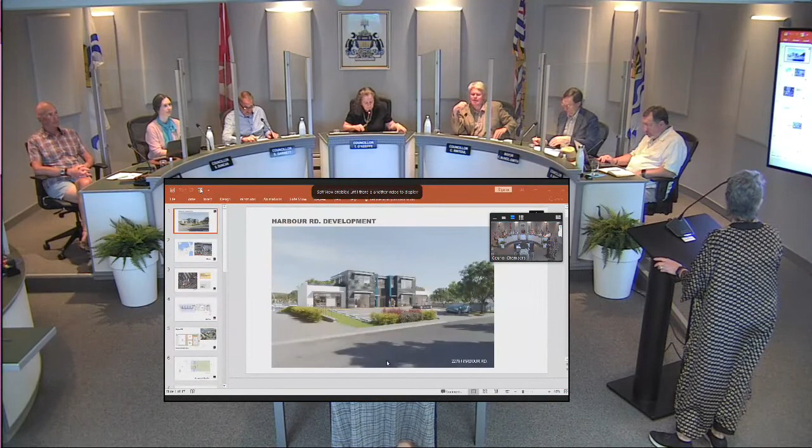Thank you. Good evening. Mayor and Council, we have the pleasure to introduce this project that you have seen before, like a year ago, with a different sort of proposal. That was a subdivision for residential units and commercial space. I didn't work on that project, so I'm not going to talk about it.

So the one that we're doing now, it's a combination of warehouse, 3 different uses, residential and commercial. So this is the front of the building, and I always have problems with this thing, so...

Okay, so the location of the site, as you're well aware, on Harbour Road, there's a marine industrial, light industrial area in Sidney, surrounded by some residential further away, but most of this area is the light marine industrial.

So the site is located here on Harbour Road, where the old Blue Peter was located, is now where the proposal is going to take place. So it's a small marina, and that wooden deck that is existing there will remain as such, and the whole development is going to take place where the parking lot is now.

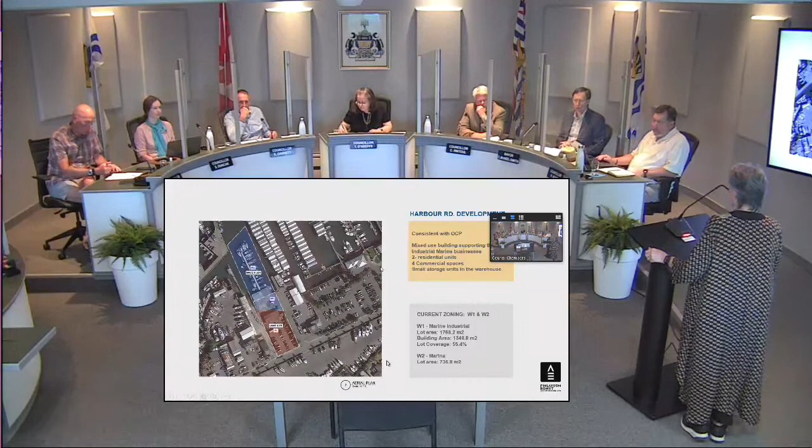So everything that's happening on W2 is the parking and services like an electrical room, mechanical room, and things to service the marina itself. So the project is consistent with the OCP, and is a mixed-use building supporting what is happening in the area. The 2 residential units add an interesting component to the area, and the 4 commercial spaces are going to be used again as potentially support for the area.

So the project itself, when we go to the site plan, we have a main access coming from Harbour Road that feeds the commercial units located facing Harbour Road. There is a pedestrian access coming right in the center, and the reason for that is, with that in mind, we were able to pull the buildings away from the road and not have to have an access point from Griffith Road, where the change of elevation is quite significant. So doing this allowed us to have one central access, not interfere with Griffith, and have a better resolution in terms of design and use.

So the 4 commercial spaces, again, are facing Harbour Road. This parking area is feeding specifically the commercial. So we have, in overall, in the whole building, the whole project, enough parking stalls to support each one of the uses.

Having the larger part of the parking in the marina ground is where most of the activity will be happening, so the residential units have their own garages. This entry allows us to get into the commercial, and also into this courtyard that feeds the residential units. We have 2 access points, entry and exit, for the parking on the lower ground, plus a garbage area and electrical at the bottom, and a loading dock to support the marina and commercial activities.

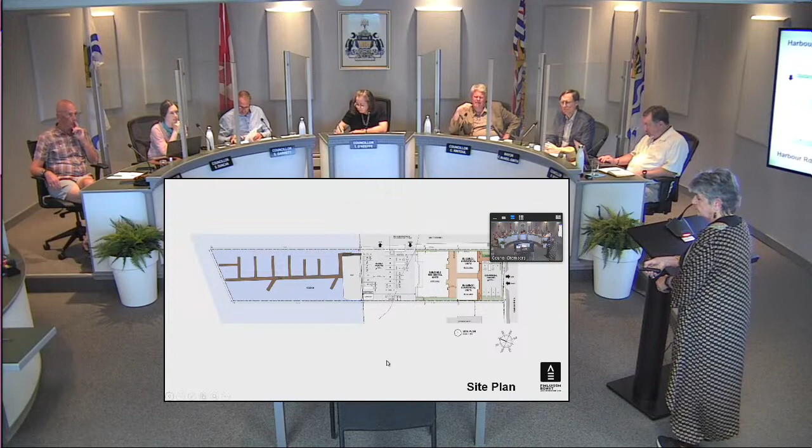All the buildings, both commercial and residential, have rooftop access with some garden areas and planters, to provide some interest and additional planting.

The ground floor looks after the warehouse. The blue indicates the access to the residential units above, which has 2 private parking stalls with their own access, a small residential-type elevator, stairs, and a storage area. Both sides are kind of mimicking each other, very similar. The entrance to the warehouse is in the center of this building, where we have vehicle entrance and pedestrian access, offices, electrical room, and all services, self-contained in this area.

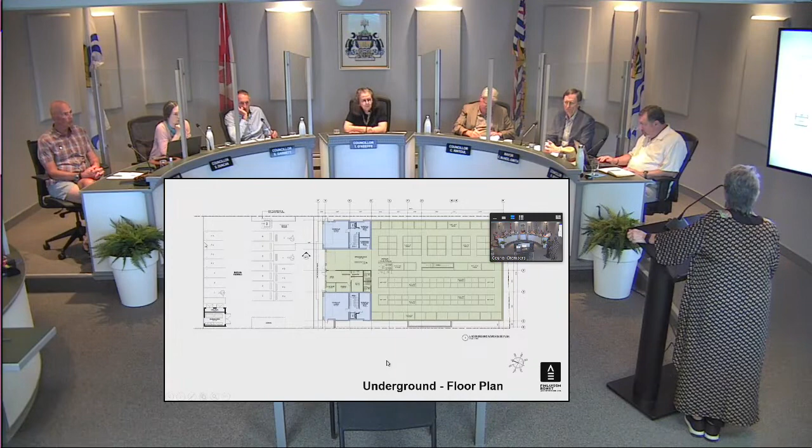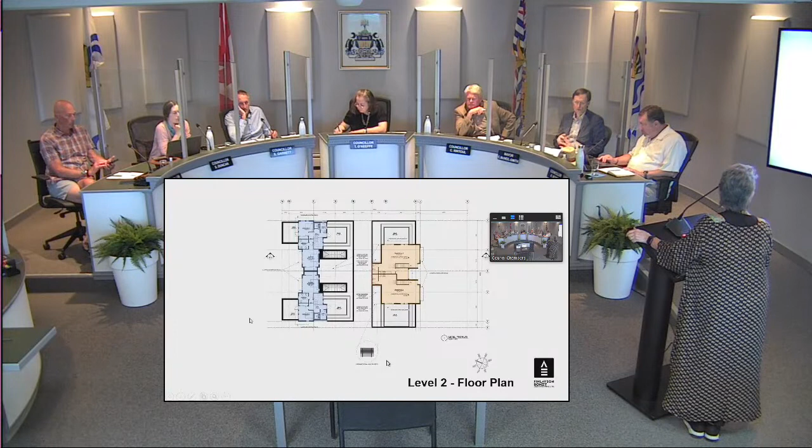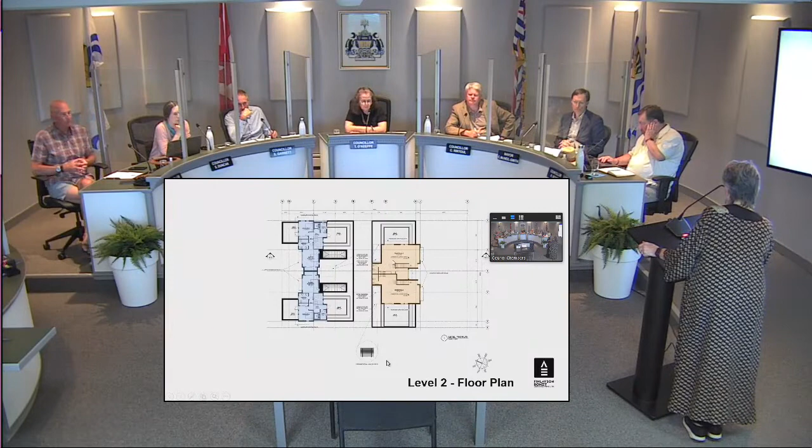The upper floor is recessed, stepping back on both sides, south and north, just to reduce the massing of the building. We have decks with planters around. The commercial section has a second floor on just the 2 central units, not all of them, to give interest and provide more options in terms of rental or purchase for the commercial. Rooftop - very interesting.

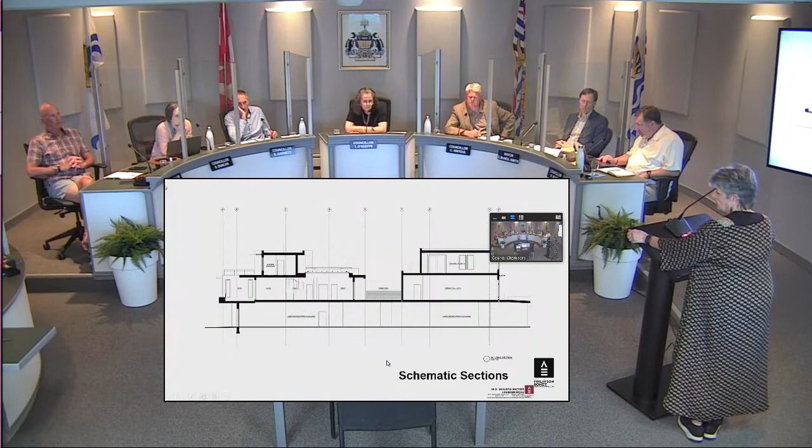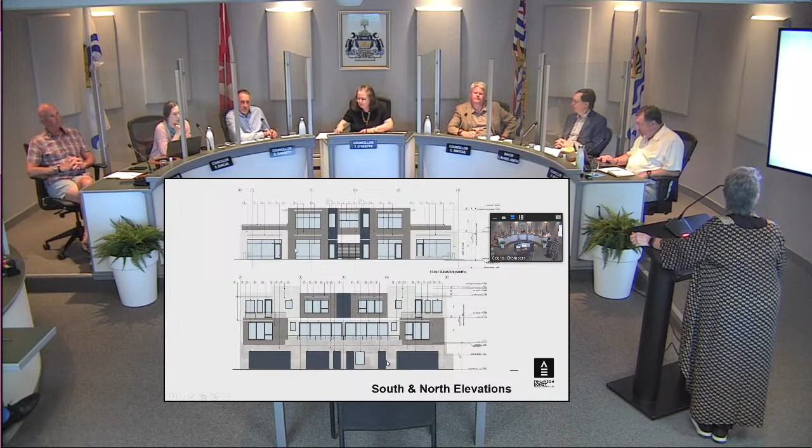The materials we're using - this is a contemporary building - are a mix of corrugated metal in dark gray and light gray stucco. We have screens and sunshades above the windows, and a teal colored detail on the recessed walls, again to provide interest.

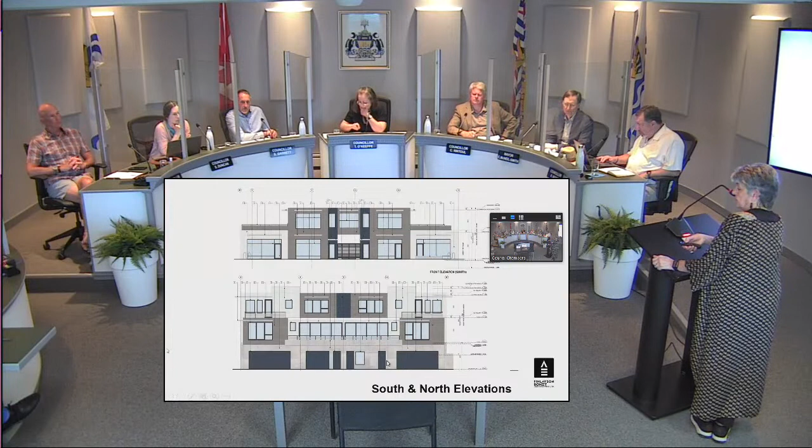This is a more realistic view of the north elevation, facing the ocean, which gives you a pretty good idea of the intent and how the building is going to look. The same happens with the elevation facing Harbour Road, with very large window areas to provide that transparency and connection to the street.

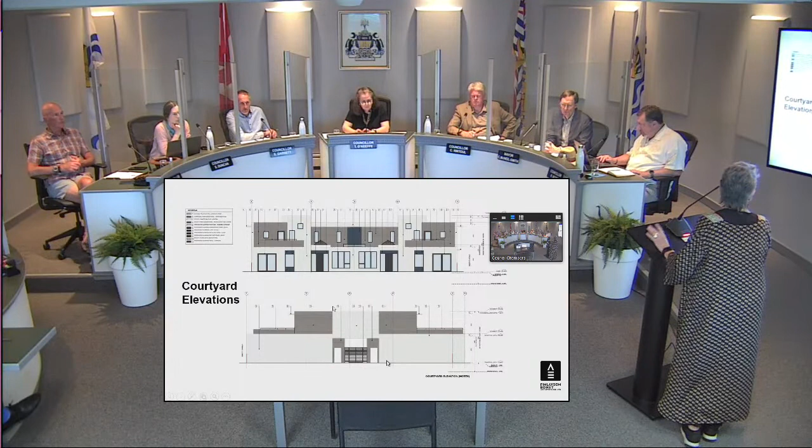This is part of the interior courtyard. One side has all the windows, while the other is the commercial side, for code-related reasons like fire separations. This is kind of a blank wall that's going to be treated with planting growing on those walls.

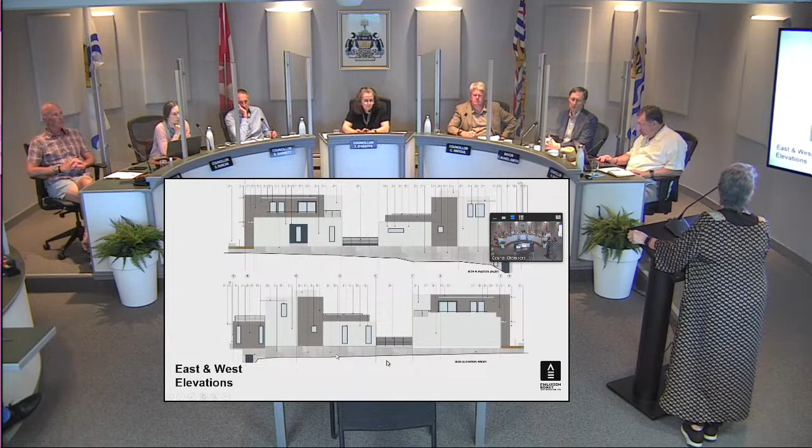On the side elevations we have a combination of exposed architectural concrete reflecting the change of elevation from the grade to the floor elevation. The commercial here shows the difference between the stucco finish and the corrugated metal, and we have the single family homes mimicking and repeating that same vocabulary. This is the 3D render showing that side, and you can see quite accurately what happens with the change of elevation between the main road and the bottom of Griffith.

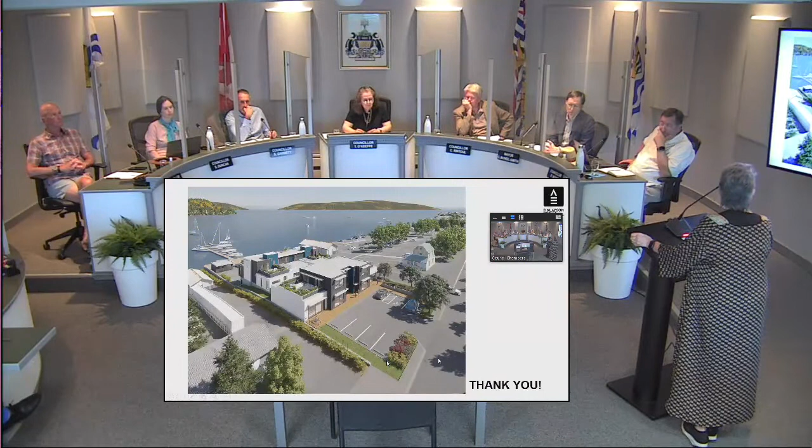Again, the top view shows the courtyard going sort of in the center, and what's happening on those rooftops, and what's the connection between the building and the surrounding areas. We've taken into consideration what's happening with all the buildings in the area, and tried to keep the height within 2 stories. Even though we could have gone to 9 meters, we wanted to keep it below that.

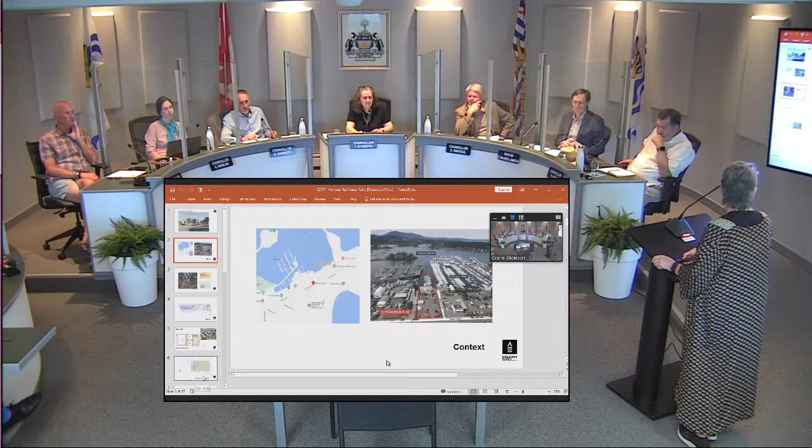Well, I don't know what I did, but I think that was the last one. That's the last view. Great.

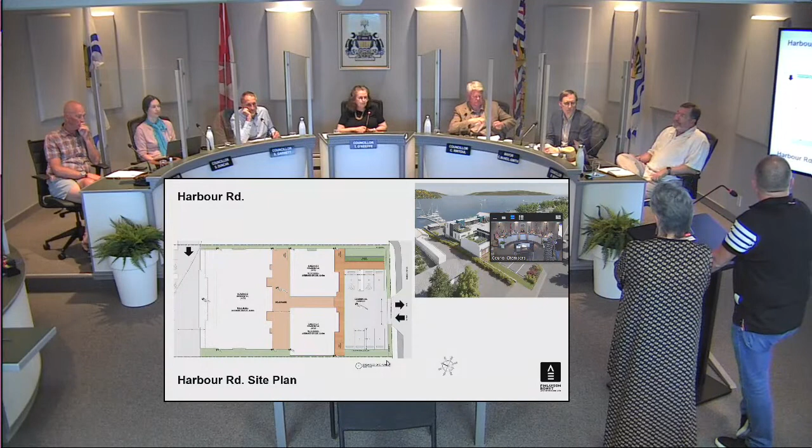Perfect, that's fine. And one more if I may, Chair. With regards to, and I think it's smart the way you planned the residential, having the bedrooms not be side by side in the building - but I'm wondering, in terms of where they're placed towards the outside, and granted there's a covenant as far as noise being in the industrial area, I'm wondering if in the design of the building you've given any thought to the way you're building the outer walls where the bedrooms would be, to help offset any noise attenuation or something like that.

Yeah, we're looking at triple glazed windows and probably a concrete partition wall between the two units as well. Okay, great. Thank you.

Thanks, Chair. Councillor Rintoul? Thank you, Chair. Thanks very much for the presentation. It's a special property, so it's nice to see the mixed use proposal on there, I appreciate that.

Maybe just on the storage facility underneath, if you could speak to that, because I missed the intent behind it - is it for your marina clients, for tenants? In our research in the neighborhood, speaking with Van Isle, they've got a small storage facility in their property, and it's full, it's bursting at the seams.

Speaking to them, they said they could use a place with much more storage. They've got, I think, over 600 slips there, and everybody seems to have stuff like crab traps, life jackets, paddle boards, all kinds of stuff that goes into boats that a lot of people take home with them and put in their garage. Everybody's kind of saying that makes a lot of sense to store it close to the marina, close to the boat, and there are lots of marinas around there too where people could pull in their boats and get stuff out of their locker.

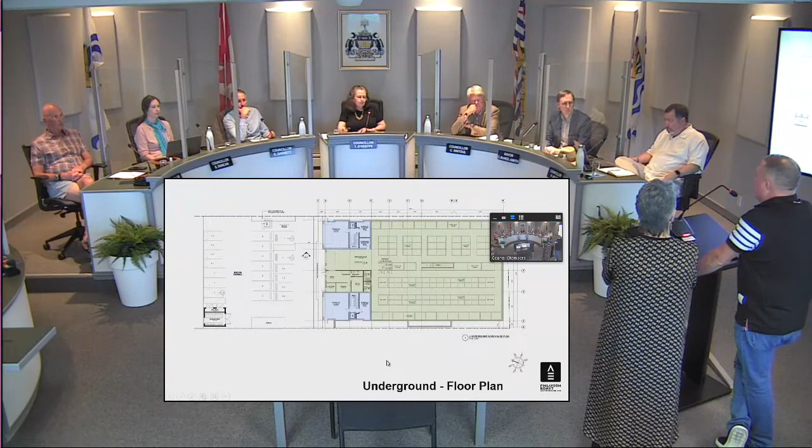So we had a feasibility study done on it as well, and it indicates that there really isn't much marine storage anywhere actually on the island. It's sort of a new thing, but there tends to be a need for it from our research.

Okay, so just to clarify, through the chair, the intent is to market it to other than your tenants or your marina clients, so there could be other parties.

Yeah, we hope the 600 slips from next door fill it up, because we've only got, I think, 26 slips, or less than that. Okay, interesting.

So I'll leave that there. If I could ask, what was the rationale for the deck space being so large in the commercial unit? I think there are 4 commercial units there, one on each side, up and down, and the deck space belongs to that commercial unit.

It's either roof or deck, and it's just kind of nice for people to go out there and have lunch in the summertime, rather than staring at a torch on roof. It might be nice to have a deck that's usable space.

Okay, so you're maxed out in the floor space you can use, you couldn't build out further? Oh no, we could have, but it just, the building wouldn't have been as architecturally appealing, I don't think. Fair enough, thanks Scott.

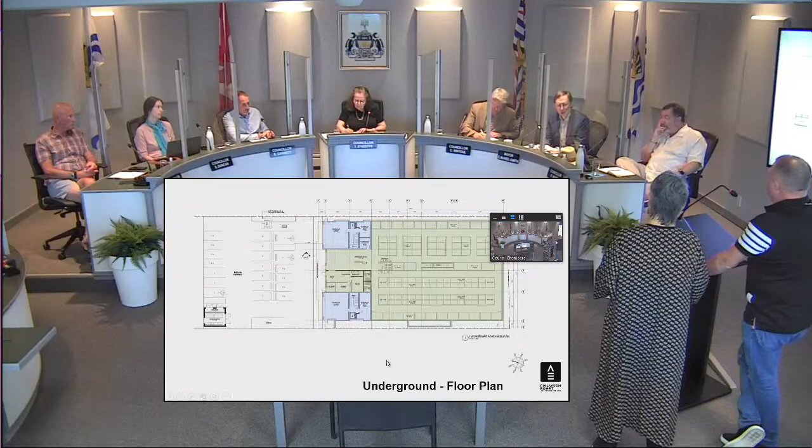Mayor McNeil-Smith: Thank you, Chair, and thank you Ms. Benet and Mr. Davies for the presentation and bringing this forward. I certainly appreciate that there are no variances in this application, and appreciate that residential has been retained in this development as well.

They weren't included in our council package - of course all the site plans and elevation drawings were, which is helpful to us. But if it's available for those renderings to be included in the information, if this proceeds to the Advisory Planning Commission, I think that would be interesting. They were sent, but not on the date the report went out, so we got it like 24 hours later. No, we appreciate seeing them this evening. Yeah, it's in the hands of the planning department. Thank you very much, thank you Chair.

All right, I'll go ahead, I've got a few questions. In regards to the allocation of space between the residential, the commercial, and the marine use, I agree with your fact-finding study that there is a real need for additional space in marine industrial areas. Given that, I wondered why, did you consider allocating more space for that purpose rather than the fairly significant residential component? What's the rationale?

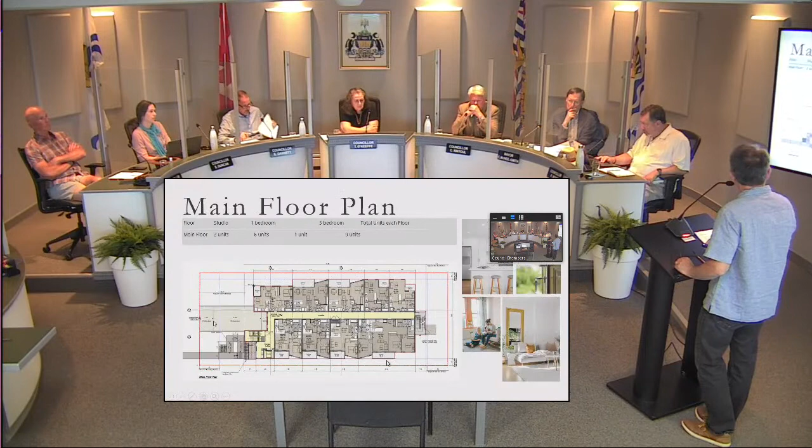The underground parking - it's more under-building parking than underground parking, but it does appear as though it's underground parking. It has 1 stall per residence, 24 bicycle parking spaces, garbage, and of course the 1 accessible space.

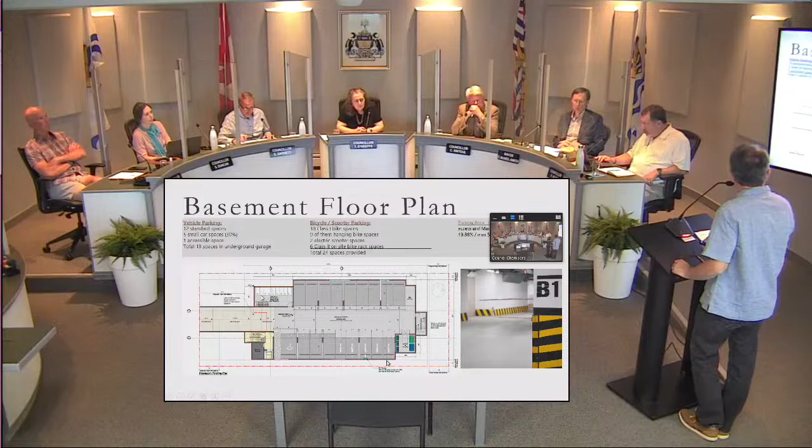The exterior uses multiple different materials: a wood-finished stained type cement Hardie board type material, looks very realistic and looks natural as in wood. Paneling that's painted in 2 different colors, and then near the entrance it's a rock facade from floor to the top.

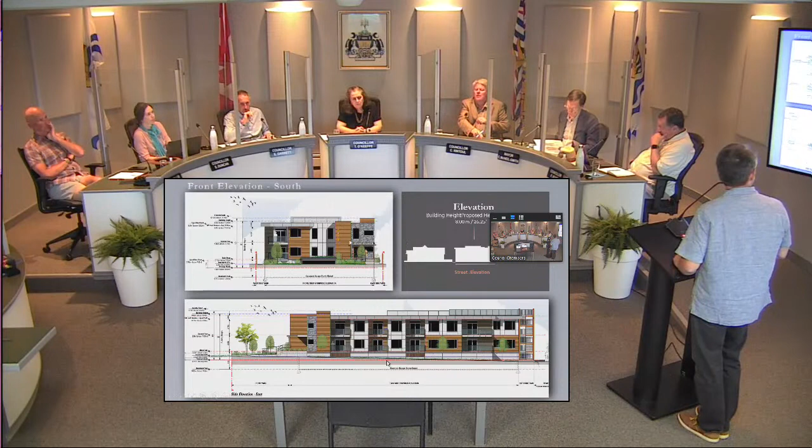We tried to keep the sides fairly bright and light, not too dark, and maintained a fairly large fascia around there just to sort of frame in the project. You can see by the elevations on the top, it fits in nicely with the residential dwellings on both sides. It's not much higher, it's basically the same.

We added additional outdoor amenity space for the tenants or residents on the roof as well as down below in the rear yard. It'll be a sunnier location, so anybody that loves to enjoy the sun can go up top. It was accessed through a rear set of outdoor stairs.

This was taken off the idea of a project. What's that one? The co-housing? The Raven project, the co-housing one where they have the outdoor stairs. You really like that look.

So that gives access to a fairly modest rooftop deck of about 100 square meters. We also pulled it into the center, so it's not overlooking adjacent residential neighbors.

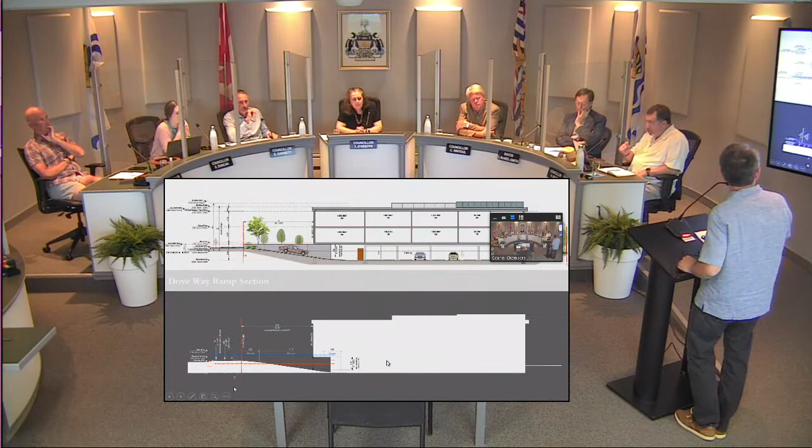That just shows you the cross-section of how it relates to Resthaven, the Parkade, and the two floors above. As mentioned, landscaping formed a big part of the plan.

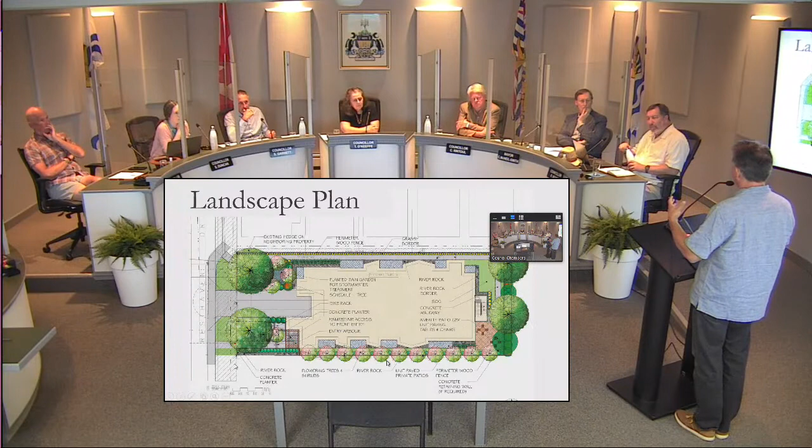As with the previous plan, we're retaining quite a bit of the vegetation on the rear part of the property. There really is no other vegetation on the property currently. In fact, it's one of the very few projects I've ever been involved with where the finished new project has less impervious materials than currently, because right now it's townhouses with a ton of concrete. So that'll be a major improvement.

And just some different perspective views. You can see the angles of the side elevations, and we think that the entrance is very pronounced now, including an accessible ramp to get up there. Well, I think that's it.

Let's make sure I made a few quick notes when I found out Joe was sick.

One of the advantages that we found to this is we're able to double the number of homes that will be on the site from 9 to 18. And the various sized units from studio to 3-bedroom provide, once again, 3 different levels of housing within each one.

Right now, we're planning on strata titling the units, but we're unsure if we're going to actually take them to market as sale or whether they're going to keep them as rental. That's going to be decided once we get our costs in and find out if we can get within the CMHC rental program. If that's the case, then of course it'll be a 10-year term under rental, but we won't know that till we get much further along with the building permit process.

Any questions? Councillor Garnett? Thank you, Chair. Thank you, Mr. Hopkins, for the presentation, and thank you for answering some of my questions in advance.

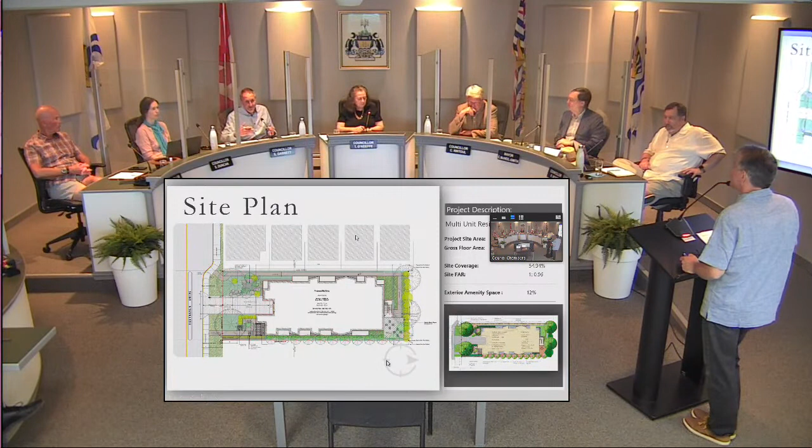With regards to the upper deck on the roof, thank you for some of the changes you made, not bringing variances. Before I get to that question, the fact that you moved the upper deck in and the privacy issues are gone, and then having the underground parking, so to speak, and not having that turning radius for unit 101 is important. And also a little thing, having the heat pumps on the roof and not having to worry about variances for heat pumps was a nice addition as well.

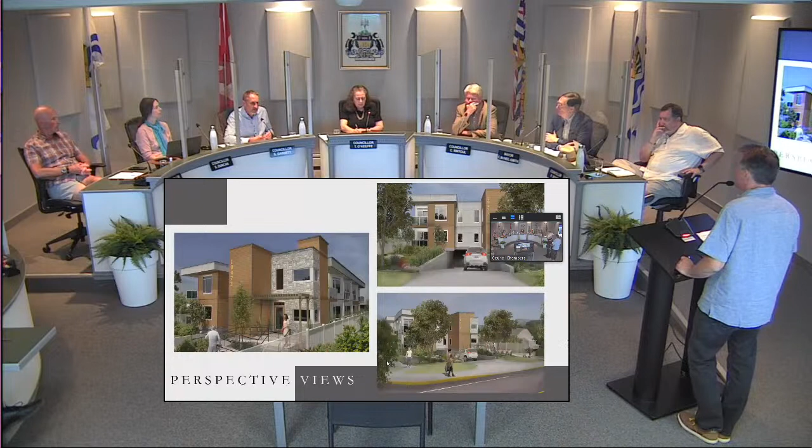With regard to the outdoor, there's an exterior staircase to access it. So we have adaptable units in this building. So would there be no way for somebody who had mobility issues or accessibility issues to actually access the rooftop patio? Unfortunately, no, because the bylaw requirements for where the elevator is placed negate our ability to. It's towards the front of the building and it's on the outside, not within the 25%. So there's no way to access it that way.

Okay, if I may, Chair. Then just as far as, because the architect's not here, hopefully you can answer it. In those same adaptable units, as far as accessing the patio, the only reason I asked is because I've done a tour of another building where they had adaptable units, but there was like a lift to get to the deck, and I thought, for me, that didn't make any sense. So when you're making your deck, will it be more easily accessible for somebody who might have accessibility issues and not have a step over of sorts?

It's a good question, because I just realized that last weekend at my mother-in-law's, she has real mobility issues, and we have to bring in care workers to get her out onto her patio for an hour because she can't make that step, and it's a pretty healthy step. It's on my list to ask the architect. I have a feeling it's going to be controlled by code in relation to the outside, how much depth you have to have between the surface and the door in relation to water and egress. But it is on my list of questions to ask them.

Great, thank you. And I just have one more, if I may, Chair. So I spoke with staff with regards to the boulevard tree that's in front of it, which will have to be removed to create space for the driveway. But further to the east, there is also a boulevard tree that fronts on 10,471 Resthaven. And where it's placed, I'm wondering if the critical root zone is going to be a factor in terms of your construction, whether that tree will be able to be protected, do you think, or will it fall victim, so to speak, to the overall plan?

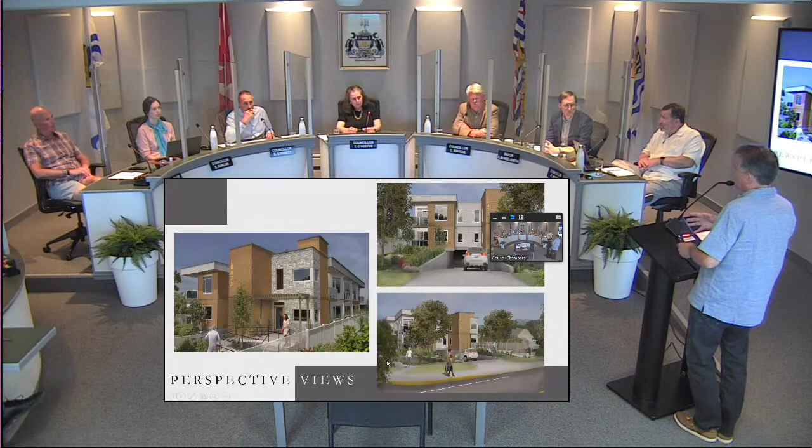I can't speak to the one of the reasons we relocated to the center for the access was because under the last proposal, staff had mentioned that tree was most likely coming out on the boulevard, possibly due to health. So yes, that one's coming out. I can't speak to the other one, if there's a second one you're referencing.

Yeah, it's not actually in front of your property, but in front of the neighboring property. I was looking at where it's located, and I believe the critical root zone would actually extend into the property at 10473. I'd say it probably does not matter, because the property now has these weird concrete block retaining walls all around, and currently you're almost at parkade grade, so we won't be going down very far. But it's something we can mention to our arborist during working drawings.

Great, thank you very much. Thank you, Chair. Other questions of committee?

Yes, Mayor? Thank you, and thank you, Mr. Hopkins, for the presentation and bringing this new application forward. Just one question - again appreciating, as colleagues have mentioned, the relocation of the rooftop patio space. In the side elevation drawings in our package, and I think in your slides, they're at a bit of a distance. Are those rooftop railings going to border the actual interior space, or are those on the edge of the building?

Are you talking about the lower diagram, right here? Yeah. Those are set way in. Thank you. All right, other questions?